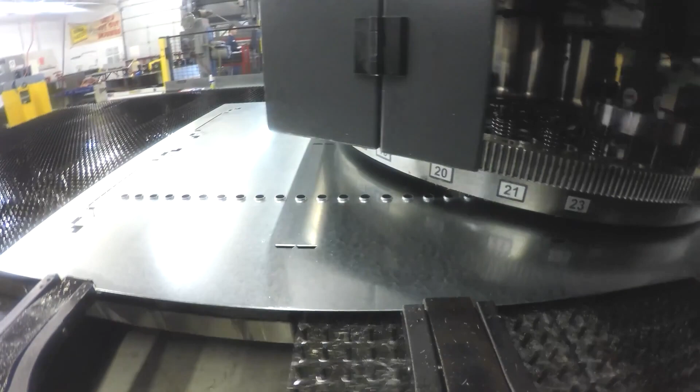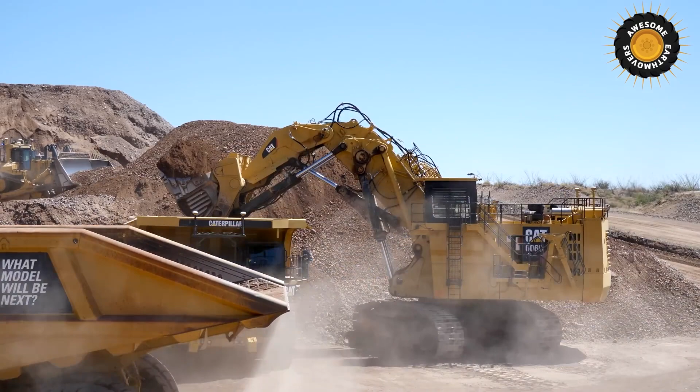a die, producing tread plates much more efficiently than other methods. The product we have designed is primarily utilized on hydraulic mining shovels, which work to provide humanity with the raw materials needed to support an ever-expanding and improving civilization.

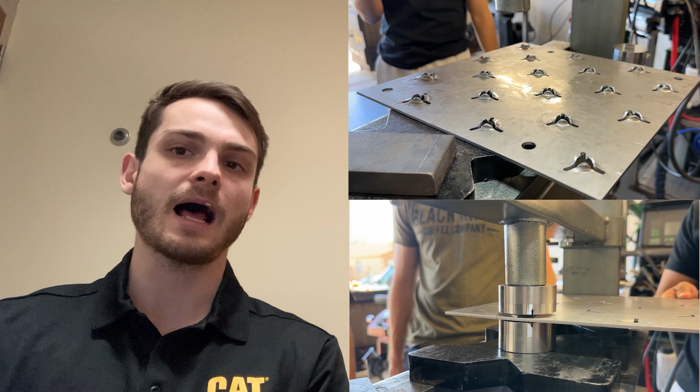Now, the current state-of-the-art that Caterpillar Inc. uses are a weld-on stud tread plate, which currently provides the best coefficient of friction, and a star punch tread plate, which uses the CNC turret press manufacturing method. What we have done is design a tread plate that has a high level of friction that can be manufactured using a CNC turret press.

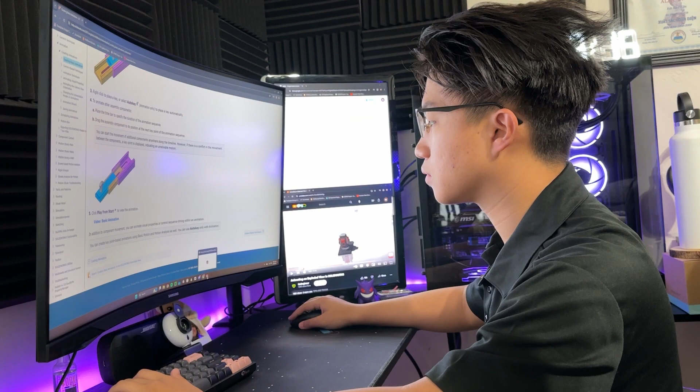Hello, my name is Stephen Gonda. I'm an engineering management major, and I am the team lead. Hi, I'm Natien Din. I'm a mechanical engineering major, and I am the mechanical design lead for this project. Hi, I'm Jackson Cobb. I'm a mechanical engineering major, and I'm the analysis lead for this project.

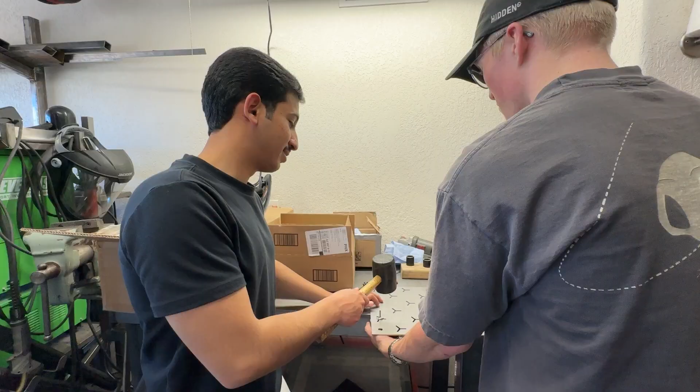Hello, I am Abdullah Al-Mutairi, and I am an industrial engineering major, and I'm the safety lead. Hello, I'm Abdulaziz Al-Shaya. I'm an industrial engineering major, and I am the documentation lead. My name is Brian Prevey. I'm a mechanical engineering major, and I'm the project procurement lead.

There are certain requirements that needed to be met in our project. We organized them into 4 sections: performance, manufacturing, geometric design, and testing. Notable requirements include that our tread plate must meet stress and design targets as mentioned in ISO 2867.

Our tread plate must meet Caterpillar's specified frequency and stress design targets. Our plate must have a coefficient of friction greater than or equal to the weld-on stud design, and our tread plate must be manufacturable via a CNC turret press process.

In this project, 3D modeling was used to create the tread plate designs the team came up with. We utilized SOLIDWORKS 3D modeling along with the sheet metal forming tool to do this. Modeling our designs not only allowed us to create a visual of our tread plates, but also gave us the opportunity to 3D print these models, which was the backbone of our testing methodology.

This rapid prototyping approach allowed us to immediately test any new designs and design modifications we came up with. 3 tests were performed for this project: a tread pattern spacing test, a friction test, and a traction test. The first test we performed was the tread pattern spacing test.

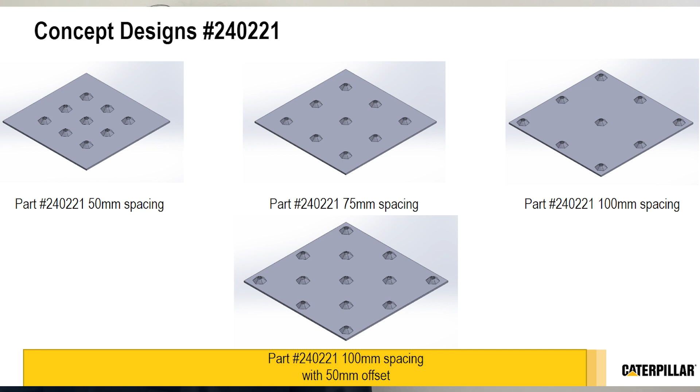The goal of this test was to determine the most optimal tread pattern spacing for our designs. We 3D printed 4 copies of 2 of our concept tread plate designs, with spacings of 50 mm, 75 mm, 100 mm, and 100 mm with a 50 mm diagonal offset.

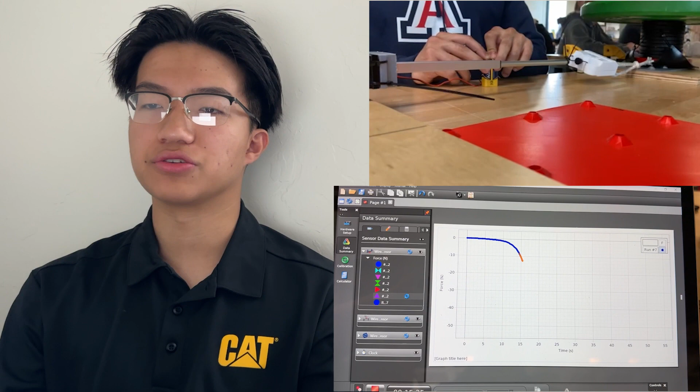This test was performed by clamping down the tread plate while pulling a weight mount across the tread plate using a linear actuator. A force gauge then collected the data needed to calculate the coefficient of friction for each plate.

The spacing we found yielded the highest coefficient of friction was the 100 mm with a 50 mm diagonal offset. Moving forward, we will only be testing designs with this spacing.

The next test performed was the friction test. The purpose of this test was to determine the coefficient of friction provided by each design, for the purpose of comparing to Caterpillar's weld-on stud plate.

This test was similar in procedure to our optimal spacing test, but the purpose is solely to find the best tread pattern in terms of friction provided, not to determine the best spacing, as that's already been tested for. The results of these tests will be compared to our baseline results to ensure the project requirements are met.

From this test, we found that the triangle tread pattern design was the most optimal, so we created 2 more designs similar to it and tested those as well.

The final test we performed was the traction test. The purpose of this test is to add another factor to take into account when deciding the best tread pattern design. That factor is the feel of the tread pattern.

Part of our project is subjective, in that the tread plate should make one feel secure and planted when walking or standing on the surface. So to perform this test, we used 2 work boots commonly worn on hydraulic mining shovels.

Boot 1 is a metatarsal anti-slip steel toe boot worn by me, and boot 2 is a hard-bottom steel toe boot worn by Jackson.

The basic procedure for this test is to have one foot hold down the tread plate, then use the other foot with the boot on it to shuffle forwards and backwards, then rotate or swivel.

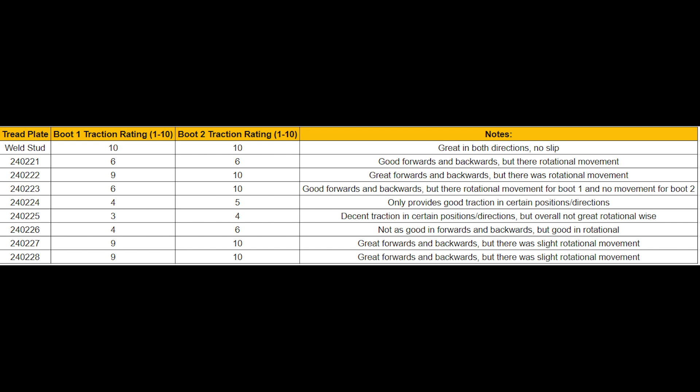A value is then recorded for the traction felt when doing the previous two movements, where a value of 1 corresponds to low traction or grip, and a value of 10 corresponds to a high level of traction or grip. These scores are then factored into the final design Pugh matrix.

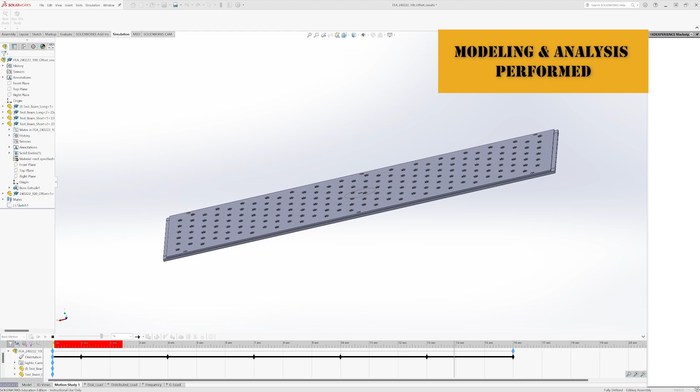Let's now look at the modeling and analysis performed for this project. As mentioned earlier, 3D modeling and 3D printing allowed us to rapidly prototype and test our designs, but it wasn't just limited to testing. We also used 3D modeling in order to set up the analysis that would need to be performed on our designs.

To do this, we created a model of a tread plate support similar to what would be seen on one of Caterpillar's real mining machines.

For the analysis in this project, we made use of finite element analysis in order to verify that we met both the engineering standards discussed previously and the stress and frequency requirements given to us by Caterpillar. To achieve this, we used both structural and modal finite element analysis.

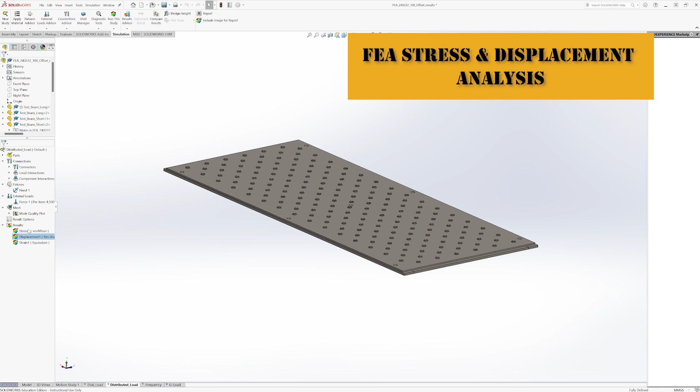Structural FEA was done to verify that our designs met both loading cases of ISO 2867, and that our design met the displacement and G-load requirements given to us by Caterpillar.

The purpose of the displacement requirement was to ensure that the plate did not deform elastically greater than a specified amount while under the ISO 2867 loads, and the purpose of the G-load requirement was to ensure that the tread plate we design does not experience any large or abnormal stresses under normal gravitational loads that could decrease the life expectancy of the product.

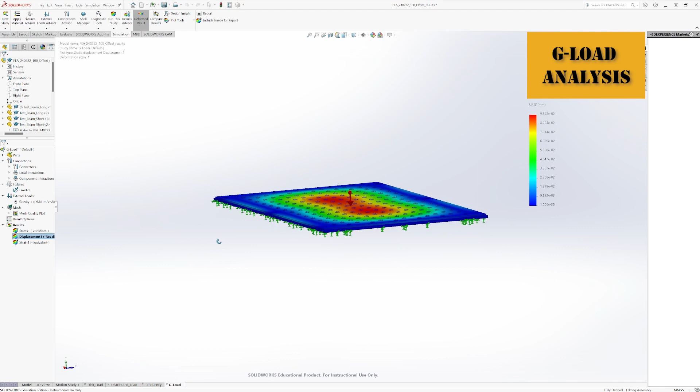Modal analysis was used to verify that our design met the frequency requirements also given to us by Caterpillar. The purpose of this requirement was to ensure that the natural frequencies of our design did not coincide with the induced vibrations of the machine under normal operation, or fall below a certain specified frequency.

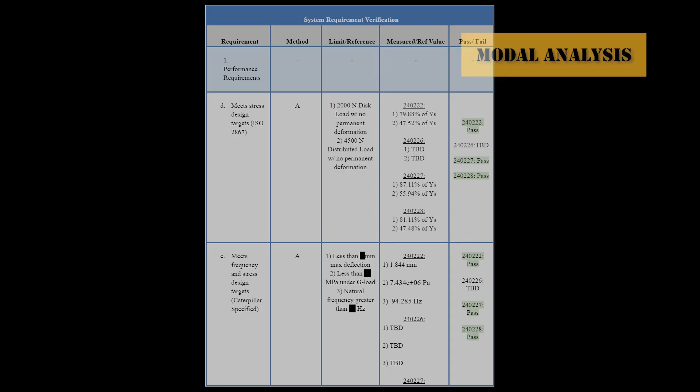After performing these three analyses on our top four tread plates, it was confirmed that our final designs met all stress, displacement, modal, and G-load requirements.

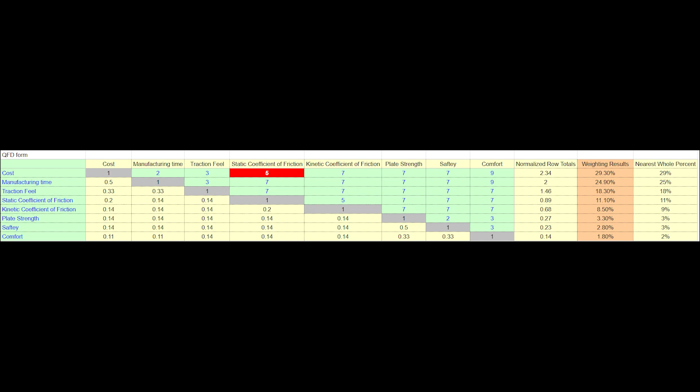After designing and testing various tread patterns, we used a quality function deployment form provided by Caterpillar to aid in weighting the various design factors. This allowed us to pick the best design to manufacture from our top four tread patterns.

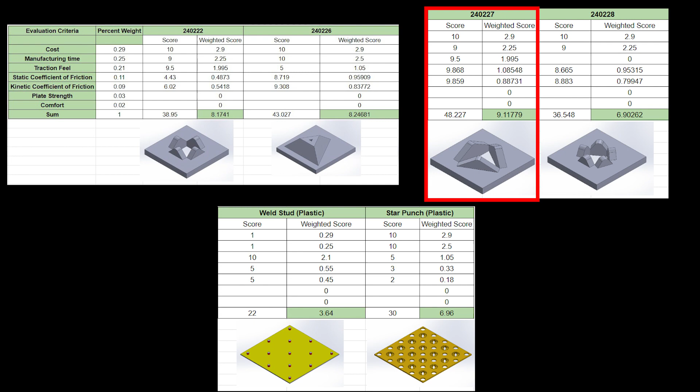As we can see from our Pugh matrix, design 240227 had the best overall score, so it is the design that we decided to move forward with for manufacturing.

After selecting our best design to manufacture in steel, a last-minute crisis occurred. The original manufacturer we intended to work with ended up not replying to us in a timely manner after we had selected our final tread plate to be created. They were going to be the ones making the tooling required to create our tread pattern, and with 5 weeks left until design day, we needed another way to get that plate made.

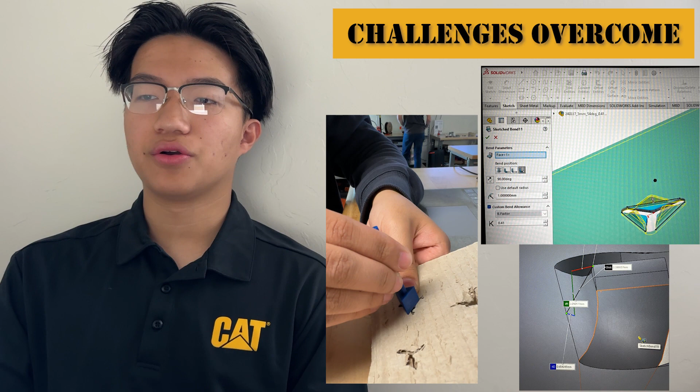We found a new manufacturer that was willing to help us create the tooling, but that left us to designing the tooling ourselves. With no prior experience with sheet metal bending, we began working with our sponsor and researching how to model sheet metal bending and the proper tooling needed to create our tread pattern design.

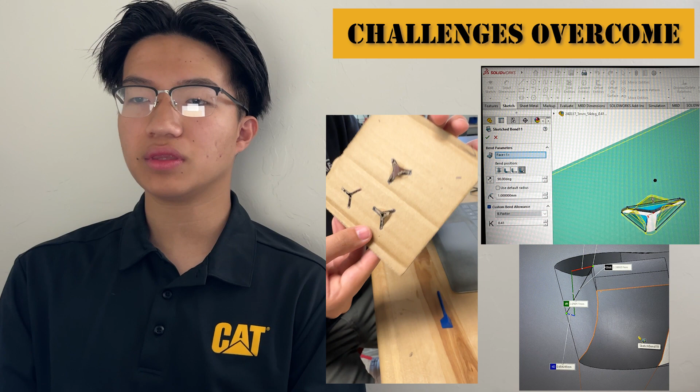We discussed with our sponsors and decided on designing a punch and die tooling that can be used in a hydraulic press to punch a pre-cut sheet of steel to form our tread patterns.

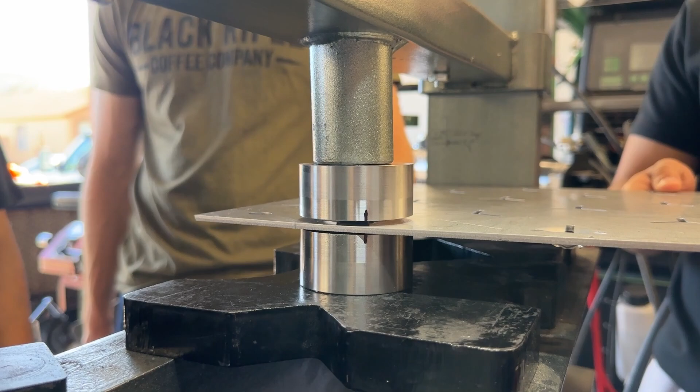Although this is slightly different than our original plan of a manufacturer using a turret press, we feel that this concept of using a punch and die tool can be applied to a CNC turret press.

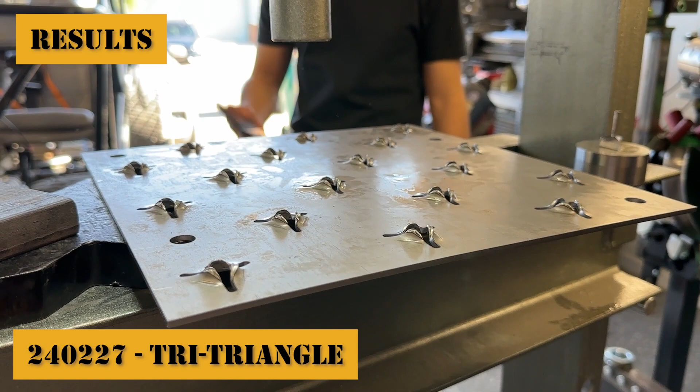So, does the design meet the requirements? Our top design, 240227, the tri-triangle, has exceeded the performance requirements set by the Caterpillar weld-on stud tread plate. Our plastic design performs 27% better than the plastic weld-on stud sample provided by Caterpillar Inc., and the results of all of our 3D printed samples is shown here.

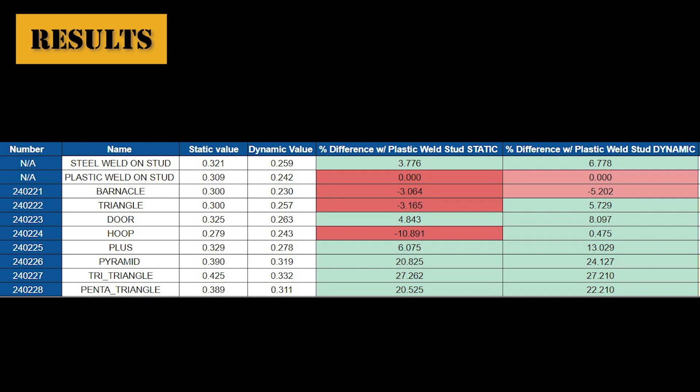All of these tests were performed in a dry environment. We then tested our steel sample of 240227 against the steel sample of the weld-on stud tread plate in muddy, dry, and oily environments.